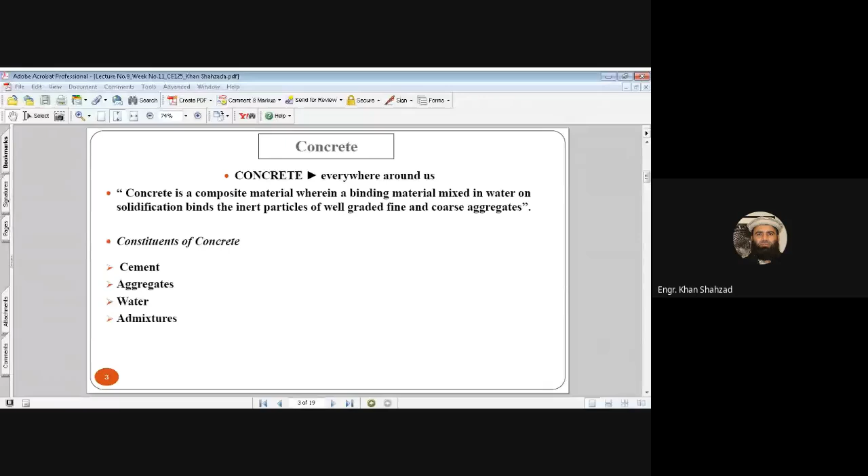Okay, so let's talk about the uses of concrete, where we can use it. We can use concrete in roads. As I told you, rigid pavements are made from concrete, while flexible pavements are made from asphalt concrete, where we use bitumen as the binding material. But when we are making rigid pavement roads, maybe you have seen in hilly areas where rainfall is heavy and the chances of road damage are higher, we try to use rigid pavements in some of those areas.

You can use concrete for bridges; most parts of bridges are made from concrete. Footpaths or sidewalks, and runways in airports, are also made from concrete. Canals, the lining of rivers or canals, are made from concrete. Mines also use concrete. In tunnels we use concrete, using shotcreting. And dams, like the Warsak dam, are made from concrete.

Then sewer pipes, the sewage line pipes, most of you have seen the drainage system or these sewer pipes, these are made from concrete. Railway ties, the railway track, maybe you have seen these ties which we use below the track of the train, are also made from concrete. Before, they were making them from timber, from wood, but nowadays they are making them from concrete. Manholes in the sewage lines, where you can send workers or laborers to clean the drainage system or the drains, are provided for this purpose and are also made from concrete.

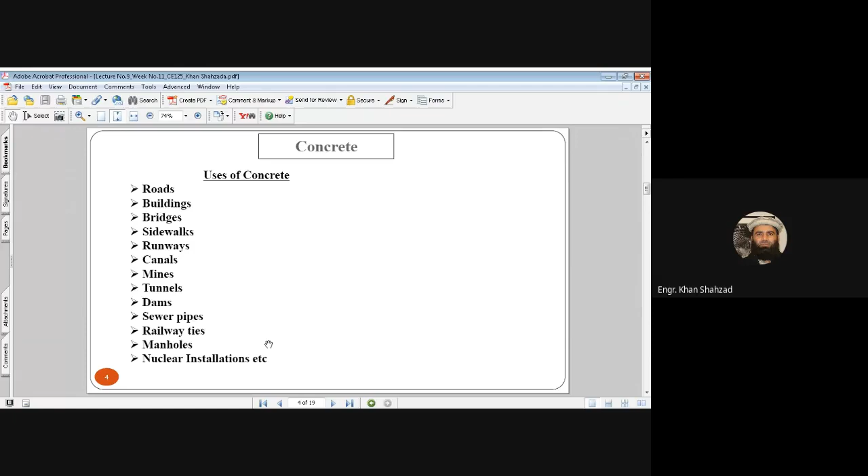In nuclear power plants and nuclear installations, they are also made from concrete, and many more things you can use concrete for. So as we discussed at the start of the class, how concrete should be, or what shall be the properties of concrete when you are using it in your house, project, hospitals, or schools: concrete should be hard so that it can resist vibration or wear and tear. It should be durable.

It should work for a long time, for the design period of the structure. It should be strong enough to resist the load for which you have designed the structure. It should be highly dense, its mass per unit volume or weight per unit volume should be high.

It should be non-porous, with no pores or voids, so that the concrete is impermeable. And the most important thing is it should be economical. Being a civil engineer or material engineer, when designing the concrete, it should be economical so that it may not cause burden on the project or the person making the house from the concrete.

We should try to design the concrete to be more economical, using maximum proportion of aggregates and minimum proportion of cement as much as possible without compromising on these properties. The typical composition by volume varies from 7 to 15% cement. When using 7% cement, the concrete will not be hard, not durable, not strong, not dense, and it will be porous, although it will be economical, but it will not have these properties.

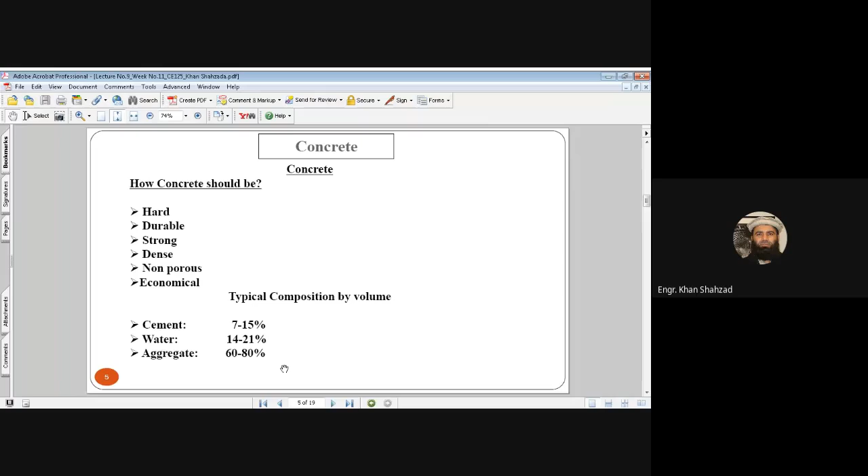Now concrete versus steel. Jalal, it is written over here that in USA, concrete consumption is 5 times by weight of steel. What does this mean, concrete consumption 5 times?

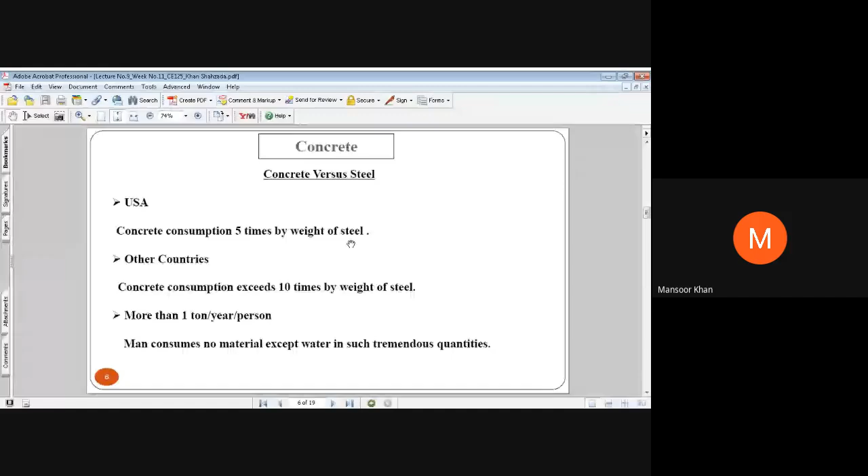In USA, because it is a rich country, they are using concrete 5 times more than steel, because steel is costly and concrete is cheaper, so they use 5 times more concrete than steel. But for other countries, because they are not that much developed or rich, concrete consumption exceeds 10 times by weight of steel. In developing countries like Pakistan, Sri Lanka, Nepal, it may be more than 10 times, because steel is very costly.

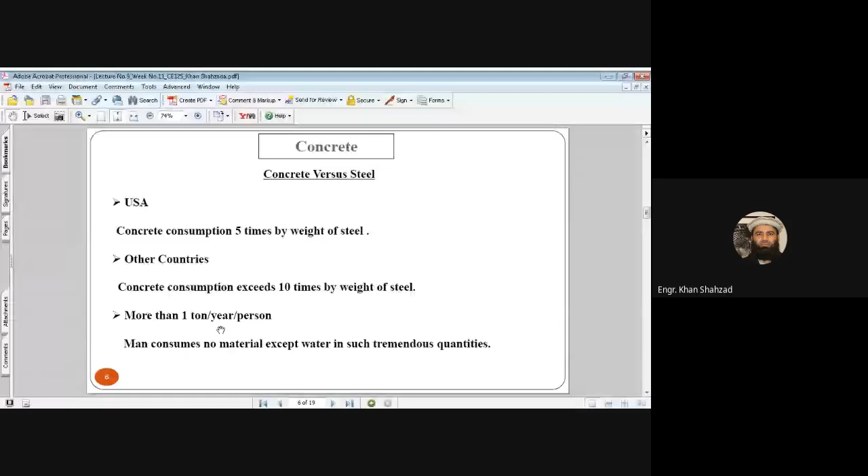So this is one survey that more than 1 ton of concrete is used by each and every person in 1 year. We are using the concrete so that we can make our structure from it, and we can have our life, or we can stay inside there, and we can save ourselves from the hard weathers and the cold weathers. We can make our offices, we can make our hospitals, we can make schools for our children. All these are the uses of concrete.

So is it okay, Abdul Munaf? जी सर.

Okay, so let's talk about the normal concrete or normal weight concrete. This is the next topic, the types of concrete. We have discussed concrete in detail, its properties, its constituents, and its uses. Now, for each and every project, we will need a specific type of concrete. So for that purpose, we need to know about the types of concrete. The first type of concrete which we will discuss today is normal concrete or normal weight concrete.

The concrete in which common ingredients, that is aggregate, water, and cement are used, is known as normal concrete. As it is clear from the name, normal concrete uses normal aggregates - coarse aggregate, fine aggregate, and water - along with normal cement, that is ordinary Portland cement. The concrete you get from these materials is known as normal concrete or normal weight concrete. It is also called normal strength concrete.

It has a setting time of 30 to 90 minutes depending upon the moisture content in the atmosphere, the fineness of the cement, etc.

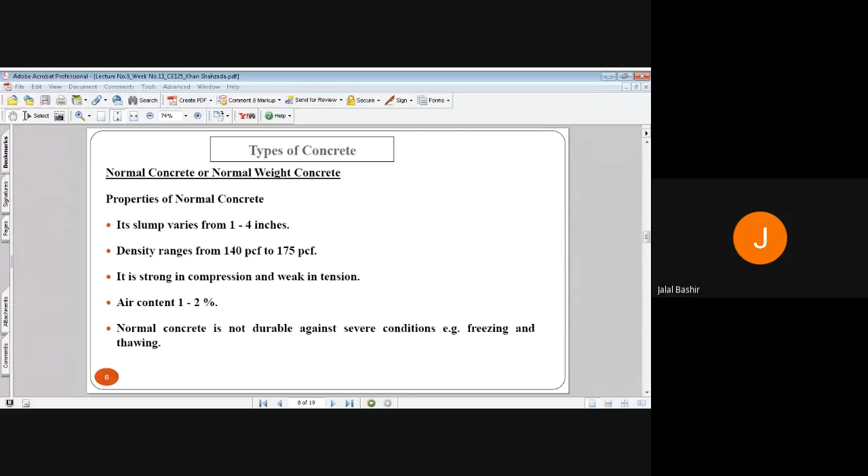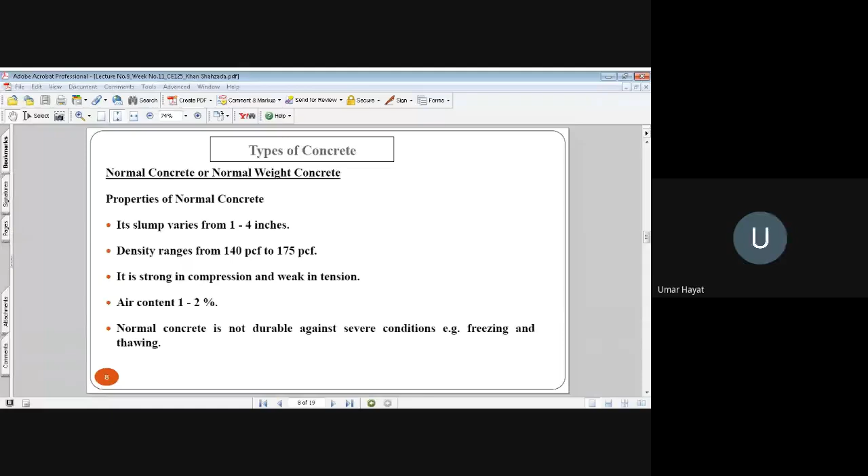This can be used where extra load is not applied, because its strength will be less as compared to normal weight concrete and high density concrete or high performance concrete. So we can use this concrete in places where extra load, maximum load, or less load is applied.

For example, parapet wall. I hope everybody knows the parapet wall, maybe you studied this in building construction material in the BCM course. Normally a parapet is a wall built on top of a roof, that is called parapet wall. So we are not applying load on that, so we can use this in parapet walls.

Road lining in between two roads, because we are not applying load on that part of the road, so we can use this in road lining etc. Or to reduce the dead load of earthquake resistant structures, as we make high rise buildings so that we can reduce the weight of the higher portions of the structure on the foundation. Similarly, when you have heavyweight structures, there is more probability of getting damage during earthquakes. When you have lightweight structures, the probability of getting damage is very less compared to heavyweight structures. So you can use this lightweight concrete in earthquake resistant structures.

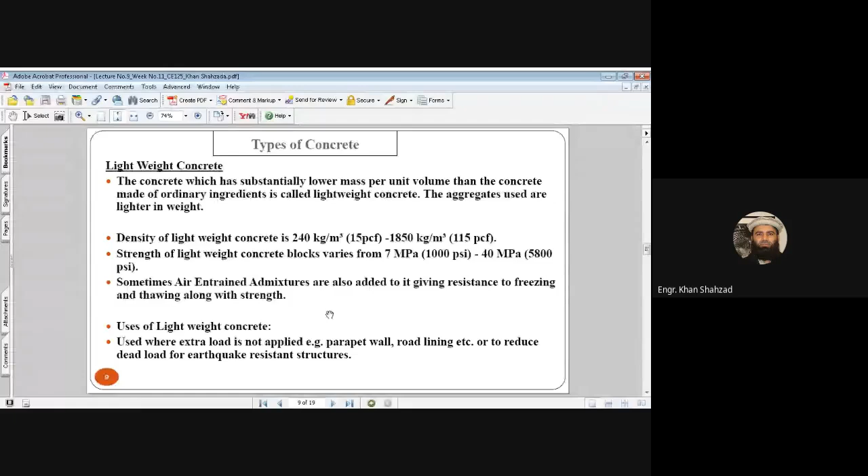The next type is high density concrete or heavyweight concrete. So where do we need this heavyweight concrete? Muhammad Ahmad?

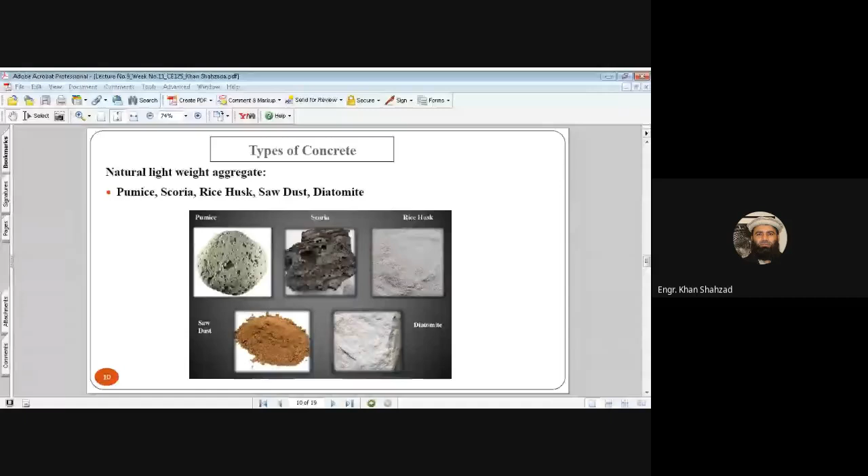High density concrete is also known as heavyweight concrete. It is produced by replacing the ordinary aggregates by a material of higher specific gravity, normally about 4, compared with the specific gravity of ordinary aggregates of about 2.6. So the material used in making this concrete has very high specific gravity.

One of the more common natural aggregates is barium sulfate, or barytes. It has a specific gravity of 4.1 and occurs as a natural rock with a purity of about 95%. Barytes behaves rather like ordinary crushed aggregate and does not present any special problem as far as proportioning of mixes is concerned.

As I told you in one of our classes, we have used this barite in one of our research works, and we have made very good concrete. With the help of this material, we decreased the thickness of the wall required in hospitals, to protect people from X-rays, gamma rays, at therapy centers, and also in nuclear power plants, to protect them from radiation. With the help of this barite, which we worked on in the Department of Civil Engineering with some people at IRNUM Hospital, we reduced the wall thickness from 18 inches to 9 inches by using barite.

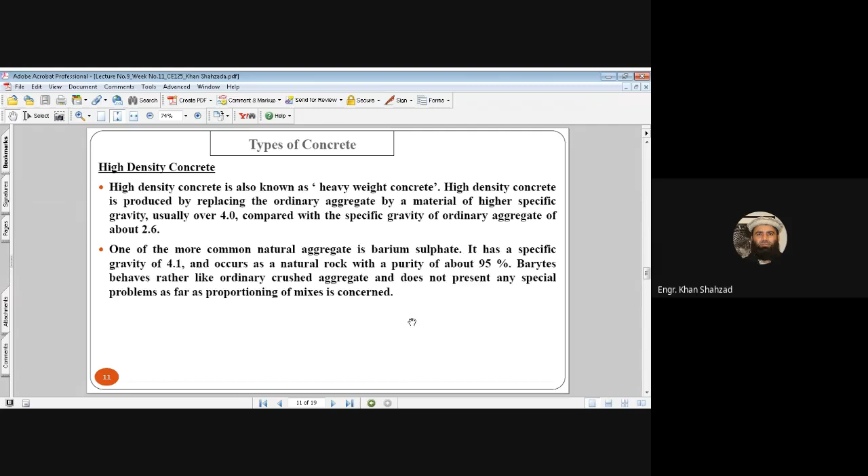High density concrete is used in the construction of radiation shielding, that is, in nuclear power plants. The question of shielding resolves into protection against X-rays, gamma rays, and neutrons. As I told you, the biological hazards of radiation arise from the fact that radiation interacts with human tissues, losing some of their energy in this process. This energy loss is sufficient to ionize atoms in the cell, upsetting the delicate chemical balance and causing the death of the cells. If enough cells are affected, the organisms die.

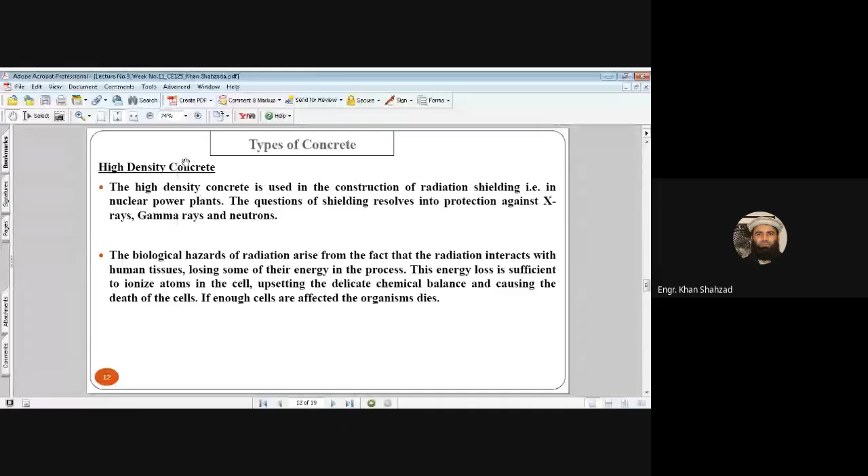So, in order to protect people from these hazards, civil engineers and material engineers have done a very good job, and they have developed this heavy density concrete, or high density concrete, or heavyweight concrete, to protect people in hospitals and in nuclear power plants. As you can see, these are the heavyweight or high density concretes.

Okay, the next one is the high performance concrete. Abdul Munaf, can you tell me about the high performance concrete, as it is clear from its name? Can you comment on this?

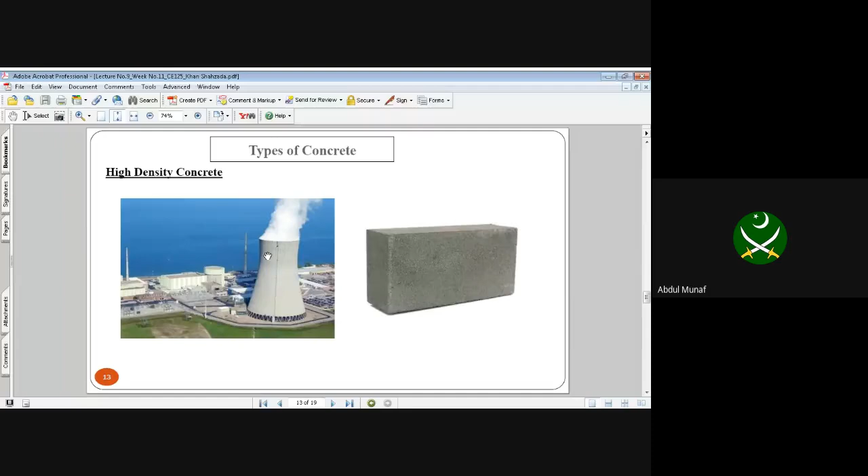Okay, Dawood Khan, can you add some more comment? Can you help your friend Abdul Munaf?

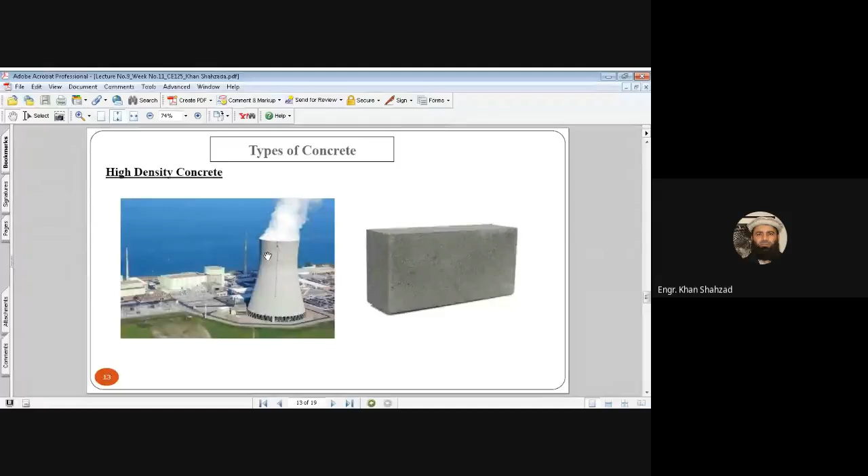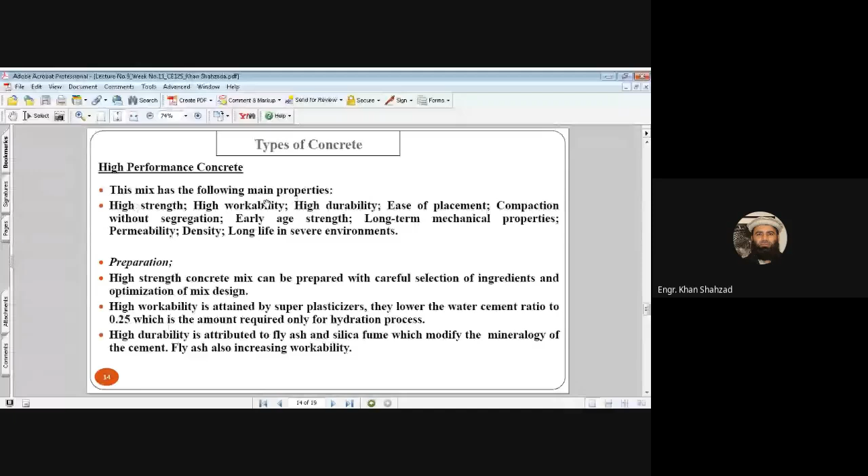Okay, so the high performance concrete mix has the following main properties. Number one, it has high strength, high workability, high durability, ease of placement. You can place it easily on site. Compaction without segregation, you can compact it easily without having any segregation. The early strength of this concrete is high. The long-term mechanical properties, that is, compressive strength, tensile strength, and flexural strength, are good. Permeability, it is impermeable, it is highly dense, and it has long life in severe environment.

How can we prepare this type of concrete? The high strength concrete can be prepared with careful selection of ingredients and optimization of the mix design, so that high workability is attained by using superplasticizers. I hope you remember this from the admixture topic. They lower the water-cement ratio because these are highly water reducing admixtures, and they lower the water-cement ratio to 0.25, which is the amount required only for the hydration process of the concrete.

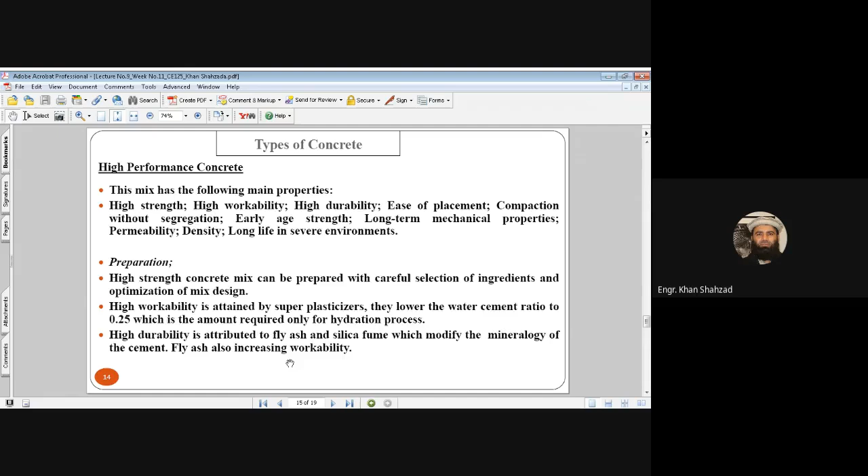High durability is attributed to fly ash and silica fume, which modify the mineralogy of the cement. We can use fly ash and silica fume as well. Fly ash also increases the workability of the concrete. Now let's talk about silica fume. What is silica fume? Silica fume is a byproduct of producing silicon metal or ferrosilicon alloys.

One of the most beneficial uses for silica fume is in concrete because of its chemical and physical properties. It is a very reactive pozzolan. Pozzolanic material refers to materials that have cementitious properties that replace cement. When mixed with water in the presence of calcium hydroxide, it has cementitious properties. Concrete containing silica fume can have very high strength and can be very durable.

Admixtures are 20 to 25% fly ash as partial replacement of cement, with the rest 70% ordinary Portland cement, so we can replace cement with the help of fly ash. It is not usually durable against freezing, so air entraining agents can also be utilized in making this high performance concrete. The strength of high performance concrete varies from 10,000 psi to 15,000 psi. The water cement ratio can be reduced to 0.25 with the help of superplasticizers.

The next topic is self-compacting concrete. Mansoor Khan, as it is clear from its name, can you define self-compacting concrete?

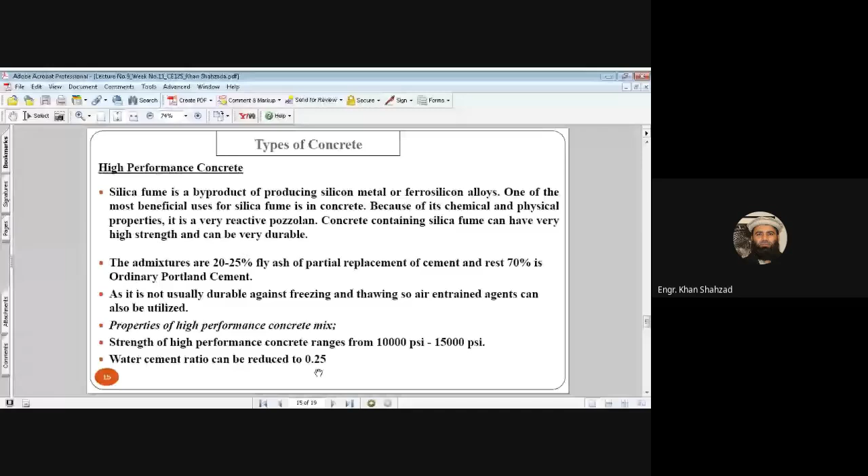Okay, the concrete where no vibration or vibrator is required. The concrete is compacted due to its own weight. It is also called self-consolidating concrete or self-compacting concrete, or flowing concrete.

This self-consolidating concrete is characterized by extreme fluidity as measured by flow, typically between 650 to 750 millimeters on a flow table, rather than slump. We can measure the fluidity of this concrete with the help of a flow table. We can't use the slump test for measuring this fluidity.

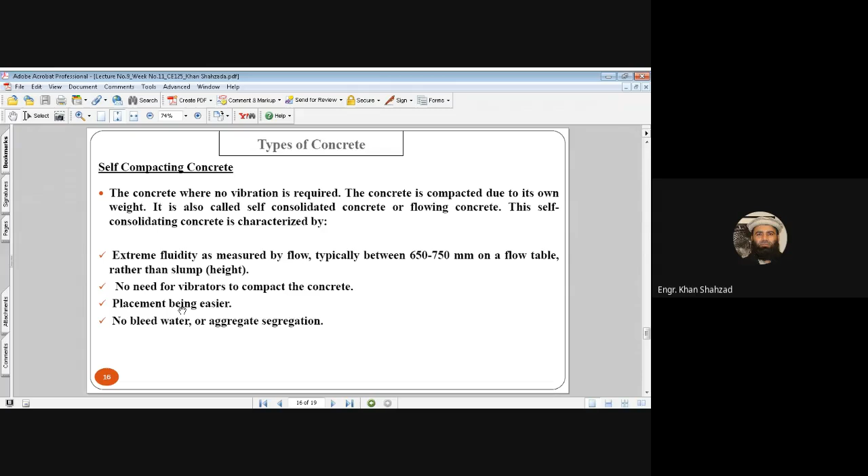No need for vibrators to compact the concrete, as we have discussed. Placement is easier, you can very easily place it because it tries to reach the required location by itself. No bleeding of water is taking place, and also no segregation is taking place.

Uses and applications of self-compacting concrete: it is used in locations which are unreachable for vibrators, for example underground structures and deep wells. Also, sometimes if we have very congested reinforcement with steel bars very close to each other, you can't use the vibrator in that place, so you can use self-compacting concrete there instead.

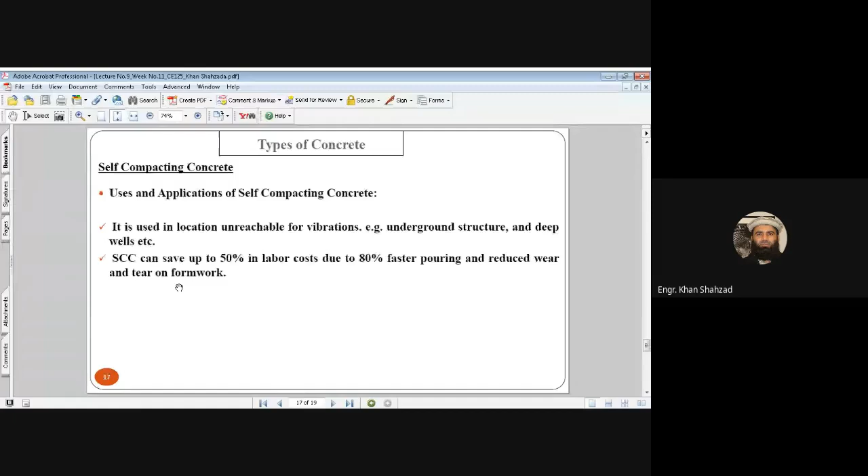The last type of concrete in today's lecture is air-entrained concrete. We have already discussed that one of the greatest achievements in the field of concrete technology by civil engineers or material engineers is the development of air-entrained concrete. It is used where the concrete is vulnerable to freezing and thawing action. It is prepared by adding air-entraining admixtures.

Air-entrained concrete contains billions of microscopic air bubbles or air cells per cubic foot of concrete. These air pockets relieve internal pressure on the concrete by providing tiny chambers or voids for the water to expand into when it is freezing, and this will not cause cracks in the concrete. This is one of the big achievements in the field of concrete technology. Other types of concrete are roller compacted concrete, shotcreting, pervious concrete, and some other types.

Jalal, what is this?

Study it by yourself. So when you go back after the class, to your houses or apartments, try to read these types of concrete. These are very very important. Is there any question so far? If you have any question, you can ask.

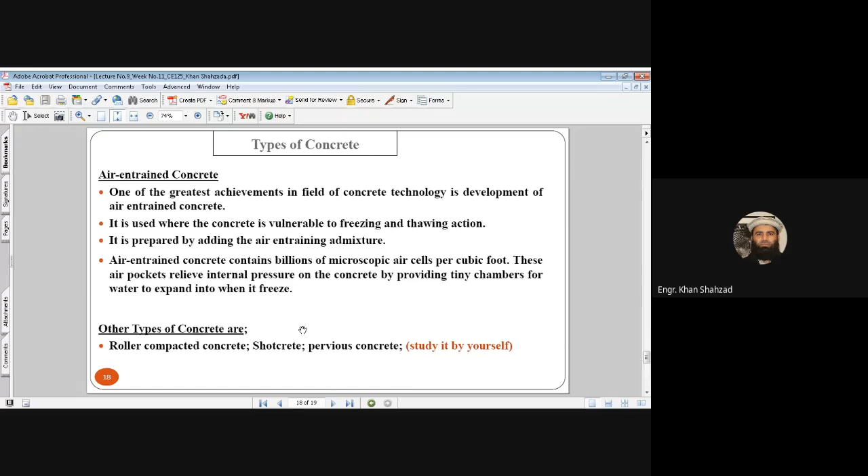If you remember, we discussed this in one of the slides, that cement has a setting time of 30 to 90 minutes, depending upon the moisture in the atmosphere and the fineness of cement. So how can this affect the setting time of concrete? If we have more moisture in the atmosphere, what will be the effect? And if we have more fine cement, what will be the effect on the setting time of the concrete? Will it be decreasing or increasing?

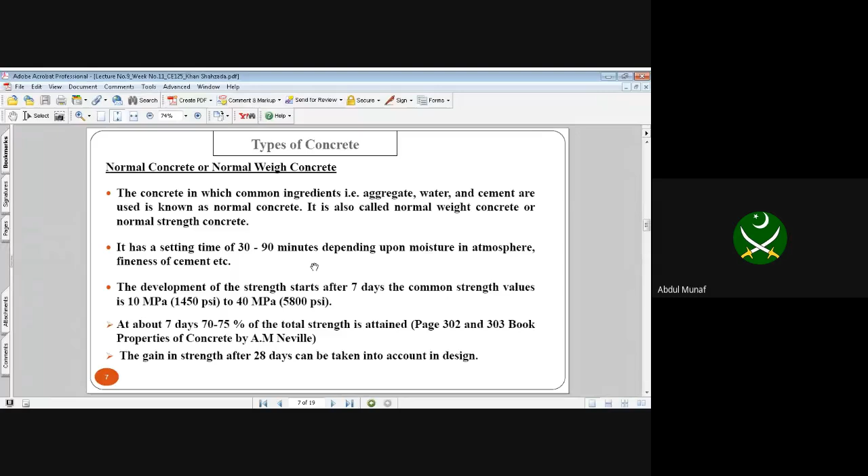This was a good question. So after the class, go back and study these things. If still you have any problem, then you can ask me again. This is very very easy, but if still you have problem, I'm not going to answer this now. We have already cleared this; some of your class fellows have already cleared this. So when you go back after class, read this in the book. If still you have some problem, you can ask me. Is it okay, Daud Khan?

Okay, any other question, beta?

Hizbullah has asked a question: what is pre-stressed concrete? If you remember, I have explained this in class. Normally in bridges, we try to pre-stress the sections or the girders, so we are trying to produce some stress.

In the section, let's say you have this girder. Then we are using some tendons, and we lock the tendon on one side, and from the other side we apply stresses, making the tendon tight. So when we make this tendon tight, what will happen? This surface will come like this, it will go up, it will go up like this. Let me make a bit of a sketch.

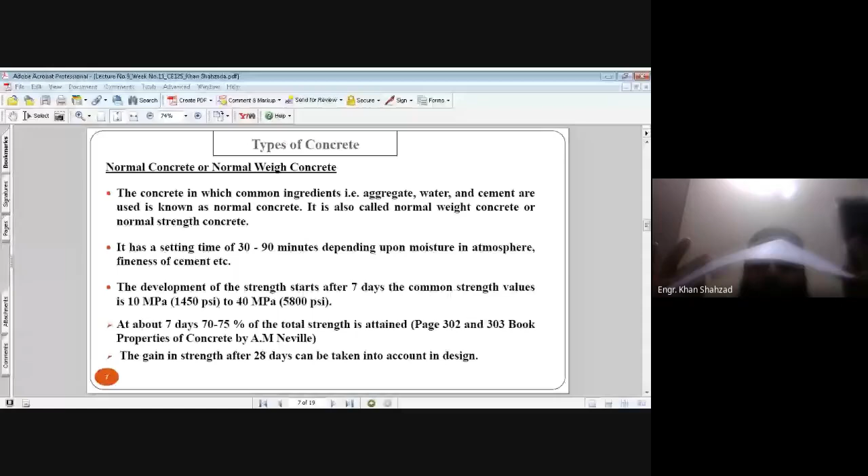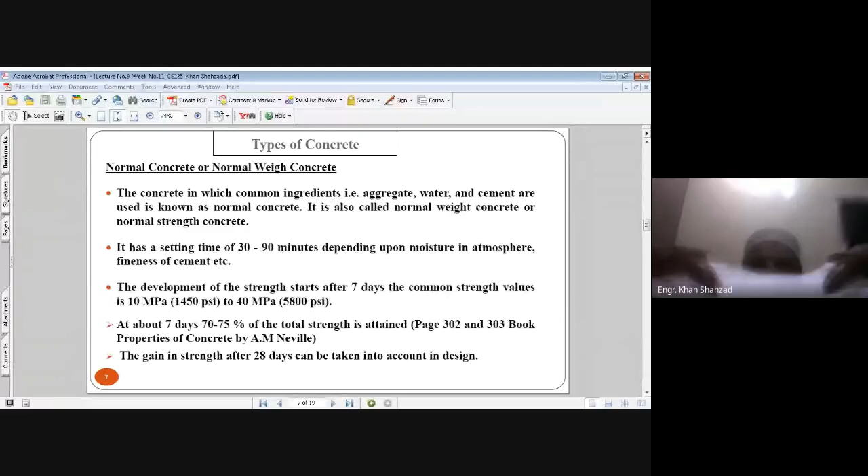A bit up on the page, sir. Is it okay? Yes sir. It bends like this, and when we are applying the forces, it can take more forces, because when you apply forces from the top, first it will come to its original shape like this, and then it will bend, and then it will bend. So this type of concrete is known as pre-stressed concrete.